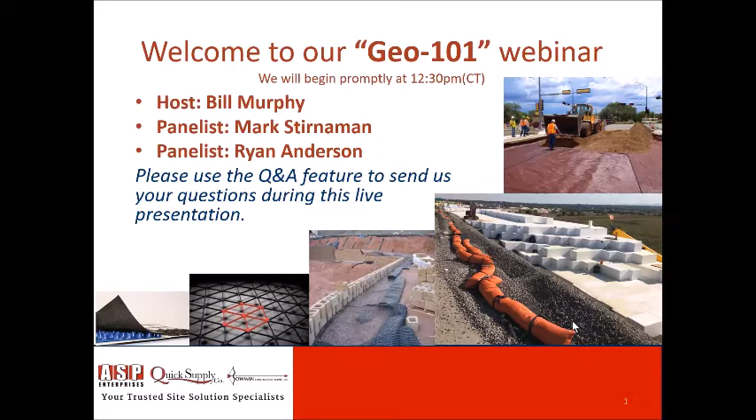I'm clicking in the screen and it says I'm controlling it, Don. There might be a lag. I may have already messed something up. Yeah, I don't know. There you go.

We do have one civil engineer on staff, that's me, I'm licensed in the state of Iowa. For our engineering friends on here, we never compete with you, we always help you. We're not in the engineering business, we're in the trusted advisory business on construction supply materials. I like to say that we are an important liaison between the designers and the owners and the contractors and the reviewers and the installers and maintainers, inspectors, everybody that's involved in a construction project. We get to be involved with all of those folks.

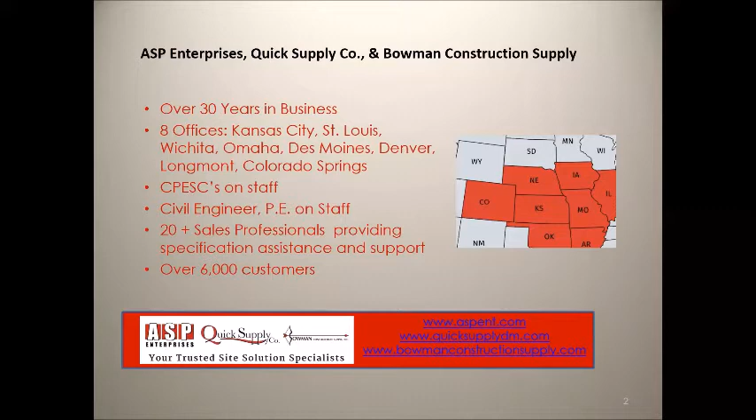But for right now, we're all up and running. We have been fully operational through this entire COVID-19 quarantine, and we have our trucks running all over those states that we showed you earlier. We've been following a lot of safety protocols. In fact, we were one of the first companies that I witnessed following safety protocols immediately.

We have some of our staff at home while the rest of the staff are at the office, and we have our doors locked. We're not pressing the flesh, as they say in the politics business, but we are taking a lot of phone orders, and we're fulfilling a lot of orders. Our trucks have been very busy. Our warehouse has been very busy.

With that, let me apologize if you hear some warehouse noise. I'm sitting in Quick Supply Company's warehouse in a private office, but you will hear some noise as we are open for business, and we are a very good logistics company.

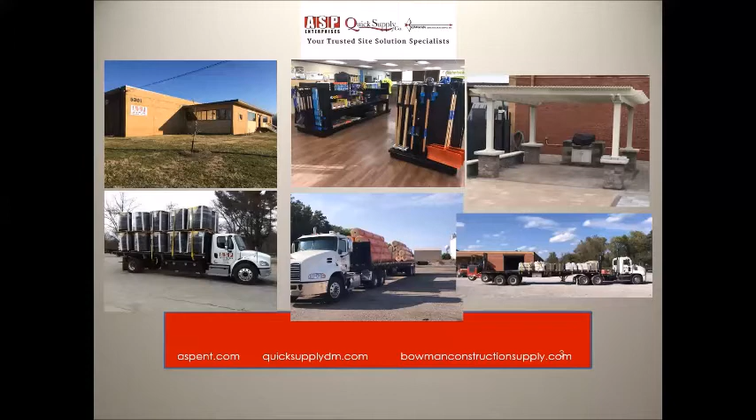We can bring a whole lot of different site solutions to a site, make it convenient for the contractor. We're an important part of that relationship with contractors and owners. One of the neat things that's really grown over the last several years, and I've been with the company for over 5.5 years, is our relationships with all of those parties I mentioned earlier.

We have some cities that count on us to help with innovation, especially in the stormwater world, in the low impact development and green infrastructure world. But one of the things we never want to do is lose sight of our roots and how we got started as a company. Geotextiles are at the heart of our operations, and they always have been and always will be. Some of the products we talk about may be considered commodities, as they are not as much the engineered products, but even commodities are part of a properly designed, properly installed, engineered solution. We take all of those solutions very seriously.

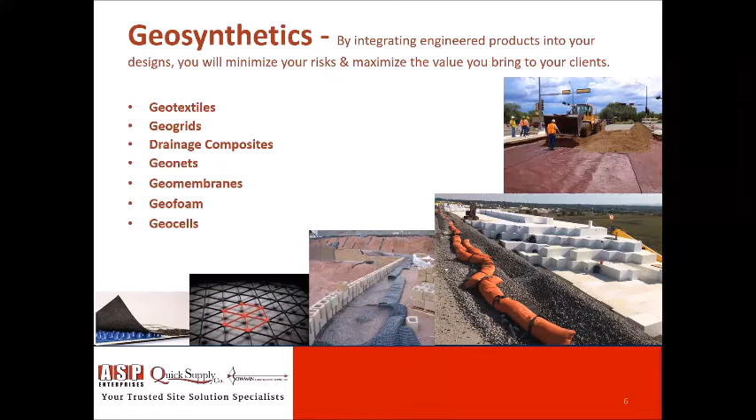Additionally in the front there, you can see geotextile bags, Big Reds, ASP cells, Dandy Bags, and Bowman's for erosion control. So geotextiles can be incorporated into projects in many different ways and aspects.

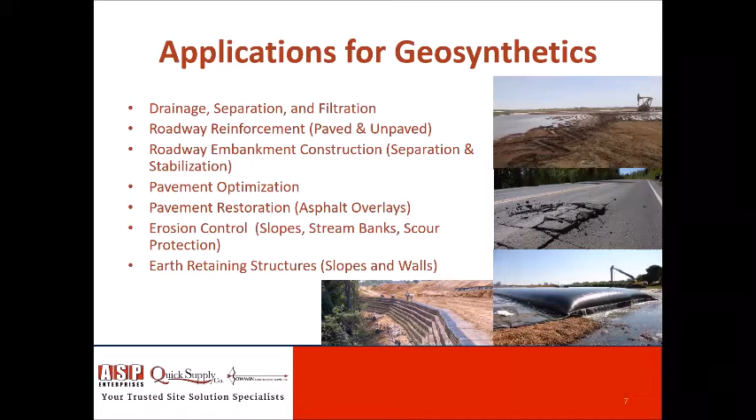Throughout this project, we hope we can challenge you to look at geotextiles in different ways. Maybe think outside the box about how you're going to use geotextiles and broaden your general knowledge of those.

Now for the history of geotextiles. Geotextiles began in the 1920s with cotton fibers, and through that period there wasn't a whole lot of innovation.

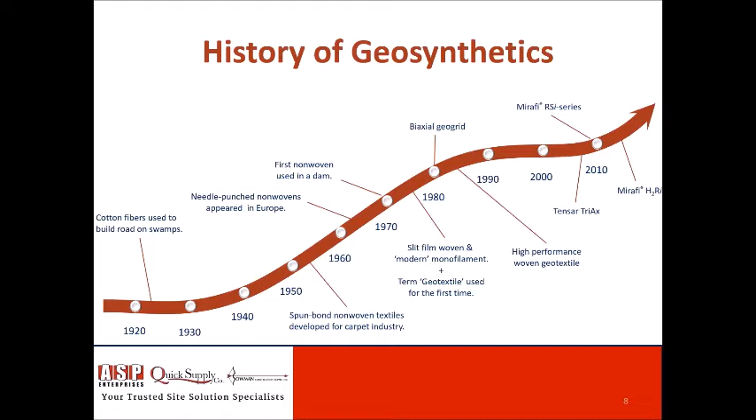To start off, one of the most common geotextiles is a non-woven geotextile. That comes in primarily two types: needle punch and spun bond.

Needle punch is just like it sounds: long needles that shoot at a very rapid speed up into the fabric. If we were in your office, we could show you a sample of that. People call it Mirafi, or that felt fabric - that's a non-woven needle punch fabric, commonly used for drainage applications.

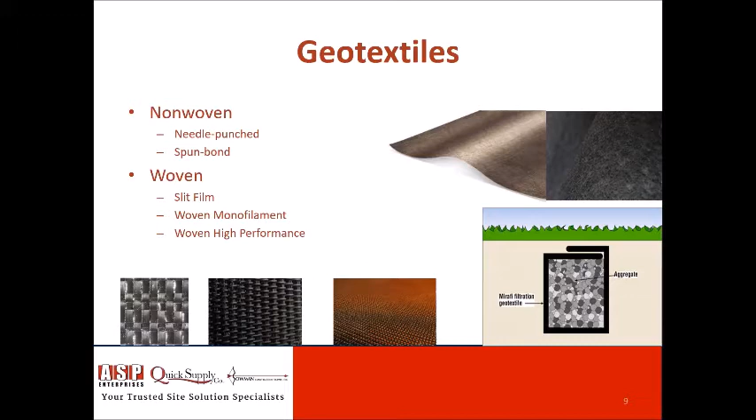In the bottom right-hand corner, we have a detail showing a French drain that would use a non-woven. Mark, anything you want to add on that? There's another slide coming up with the non-woven stuff in a bit, we'll talk more about them.

Okay, geogrids. Geogrids come in all shapes and sizes, and they've really evolved throughout the years. Probably the most common is your polypropylene, which is a punch and drawn geogrid, commonly used for road-base stabilization - your Type 1 or Type 2, or your triaxial grid, as you might hear people refer to it.

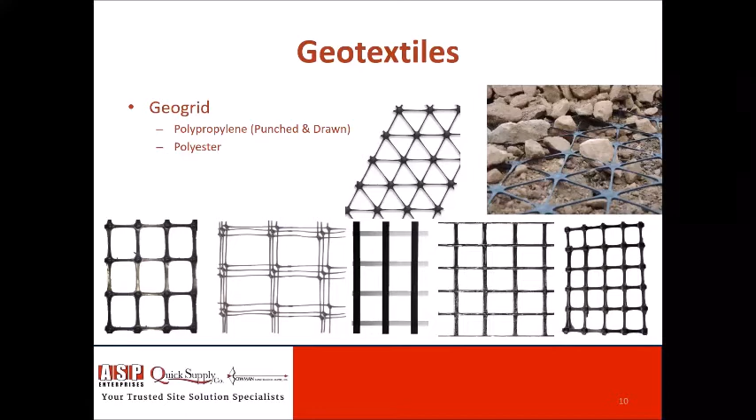One of the most common applications for a geotextile is drainage geotextiles. The most common fabrics that we sell, or you'll see in the marketplace, would be like a Mirafi 140N, the N series, or the S series, which is the environmental series.

One of the things we'll talk about later is that within drainage you can also use a woven, a monofilament geotextile that we'll cover a bit later. We just want to bring to your attention that woven geotextiles can be used in a drainage application if you select the right one.

Some of the most common applications for the N series are French drains, or any type of separation where you're going to have rock separated from the native soil and drain it. They're also used for cushioning at times for liners or different types of construction applications. Anything else you think to add on that one, Mark?

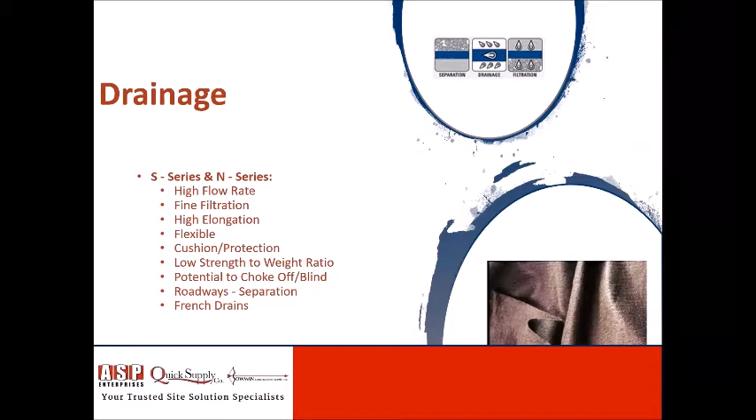Maybe riprap is probably the place people see it most, driving down the road. You see DOTs installing fabric under riprap all the time. A lot of that's another great example of how you'll see that non-woven spec.

In my humble opinion, it's really the better way to do it, wrapping the whole trench and not blocking the pipe. We sell a lot of what we call 4-inch perf with sock, where you put a geotextile actually on the pipe. There's nothing wrong with doing it, it still works, but I feel like it diminishes the performance of the pipe by blocking the holes somewhat.

If you size the rock appropriately, like a 1-inch clean rock, when you only have maybe at the largest a 3/8 diameter hole in your pipe, the 1-inch rock won't go through the 3/8 hole. You'll get a lot better flow through the rock, through the pipe, and convey that water away. You'll use the non-woven fabric to separate the soil from the trench and the rock inside of it.

I'm sure everybody on the call has probably seen French drains and specified French drains before, but it's, in my opinion...

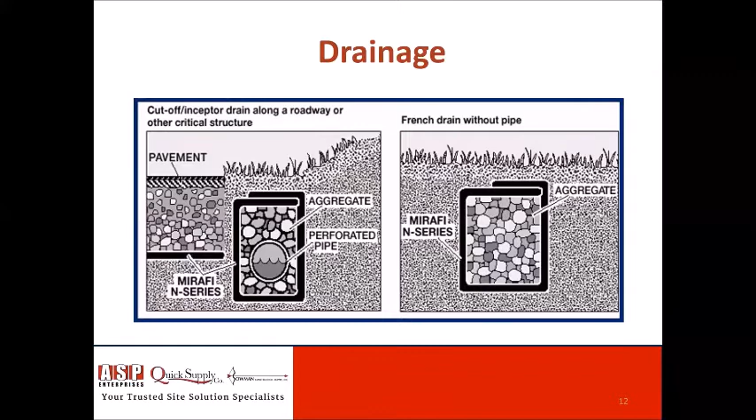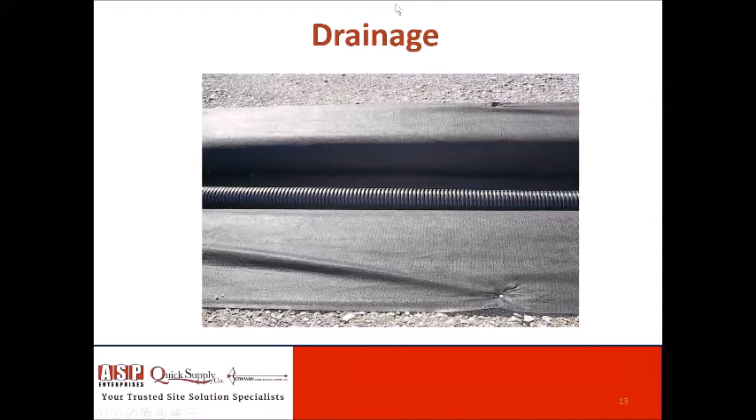Brian, I think you still have control. If you can... yep, we'll go to the next slide here. Here's a more real life example, this is basically a French drain, it's actually on an athletic field. This one is kind of neat because they use something... oh, now I got control. I feel more important now.

That picture with the French drain in the field, a lot of time was spent establishing that subgrade. They actually have a subgrade excavation plan on that job where they put the crown of the field in the middle, and that perforated pipe will take it away. Water will go into that trench and ultimately be backfilled with clean rock and conveyed through the clean rock and through the pipe itself.

The subgrade excavation plan part of it is that it's higher in the middle. It'll ultimately be covered with synthetic turf, but maybe there's 4 inches of rock in the middle over that pipe, and as you get to the outside, there'll be up to 12 inches of rock or more.

I used to think, man, that's a long name for fabric. Then the more experience I got, the more accurate I thought that really is the most accurate way to call the fabric riprap fabric, because the fabric is doing the work of holding the soil down. It's controlling the erosion by holding the soil where it's supposed to be. The riprap, or in this case articulated concrete block, is doing its job of holding the fabric down and dissipating energy. But without the fabric below it, it would scour out around the rock, around the concrete blocks, and you wouldn't have ultimate success.

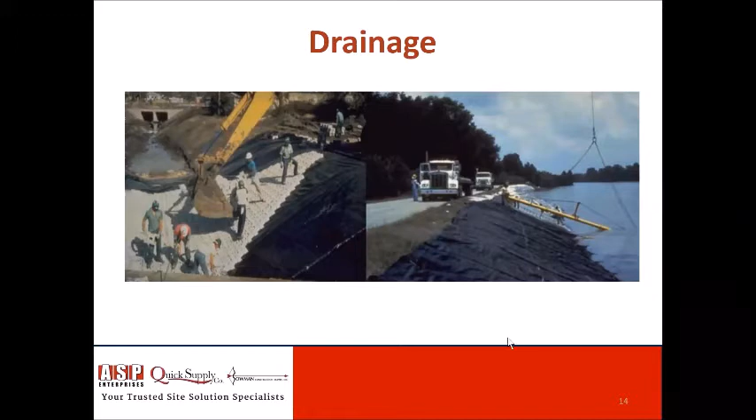So, yeah, one of the key things you'll see, even when you're doing riprap or any type of roadway, is separation. Separation is separating and maintaining the integrity of two dissimilar materials.

This can be really important to keep your aggregate clean, for example in the roadway application. Your aggregate is expensive and tough to come by. If you provide a separation layer, you can keep it from going into the native soil. If you didn't have a separation fabric, this is one of those examples of the old saying: 12 inches of rock and 12 inches of mud gives you 24 inches of mud.

You're very good at math too, Mark. Yeah, that's the old saying. So that is the key to separation anytime you're dealing with those types of applications. That's a great example and a great way of looking at it.

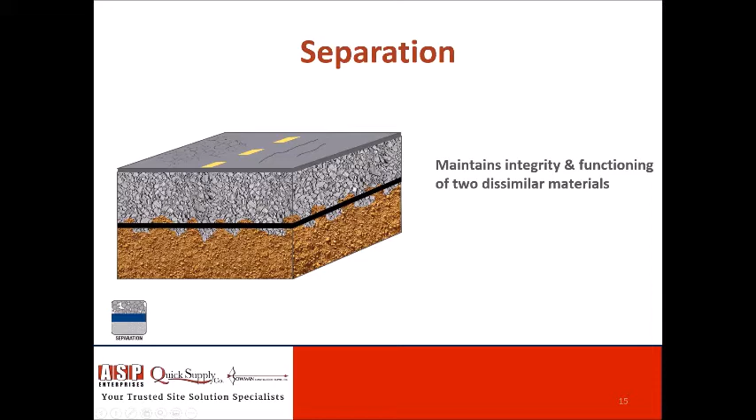The next key function of a geotextile is filtration and drainage. So like I was saying, one way a geotextile can be used is separation. Another way is filtration and drainage.

Filtration is liquid moving through a geotextile, similar to it moving vertically through a dewatering bag or any type of pass-through. Drainage is moving within the plane, similar to a pipe or a drain board, or one of the new fabrics that Mirafi came out with, the H2Ri series, which can move liquid or provide drainage laterally within a plane. It's the only type of geotextile fabric with that capability out in the marketplace.

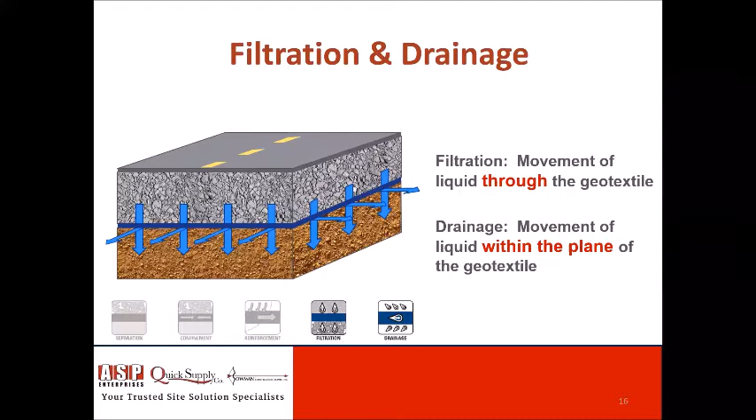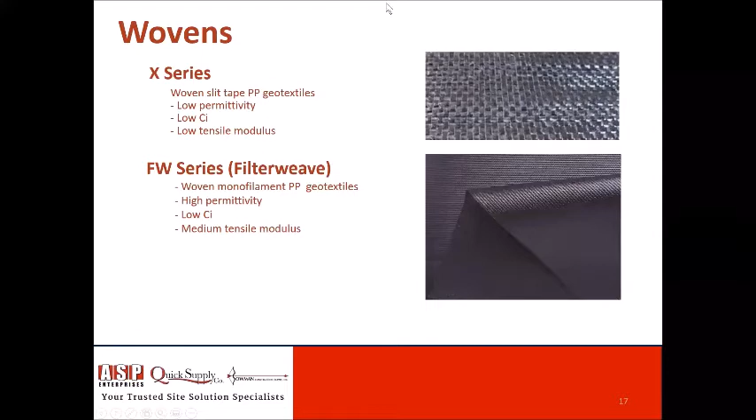Now we're going to switch gears. And we go from non-woven fabric to woven fabric.

The non-woven fabric, like Ryan mentioned, is always the felt fabric, the Mirafi, as people love to call it, and it's very popular, you see it all the time. The woven fabric, people call and say 'I need that shiny stuff, the slick stuff, the stuff that looks like silt fence.' That's the woven fabrics we get into.

The most popular one we sell, which is often the least expensive, is the X series of fabric, like 500X, 600X. I'm sure you guys have specified them in the past or seen them submitted. They were kind of the original fabrics when it came to specifying them on jobs. They were really good at the time, and they've been replaced with a lot better things. They still have their place.

We sell them on a lot of haul roads, where the contractor has to go in and install a haul road with some big chunky rock, maybe to clean tires and stuff. Ultimately, after 3 months or 3 years of the job, they have to remove that rock, and it helps with cleanup. So it acts as separation and adds a little bit of strength. It doesn't bring a ton of value in strength, so if there's a poor subgrade, we probably need to move to something a little bit stronger. But we sell 500X, 600X all the time.

The Filterweave series, like Ryan mentioned, gives you the best of both worlds. You're getting strength from a woven fabric, but they weave it in a way that has a very consistent opening and a high flow rate, so it lets a lot of water go back and forth. Part of the problem with getting the best of both worlds is the price isn't at the same point as an inexpensive non-woven or woven, but it also has its place.

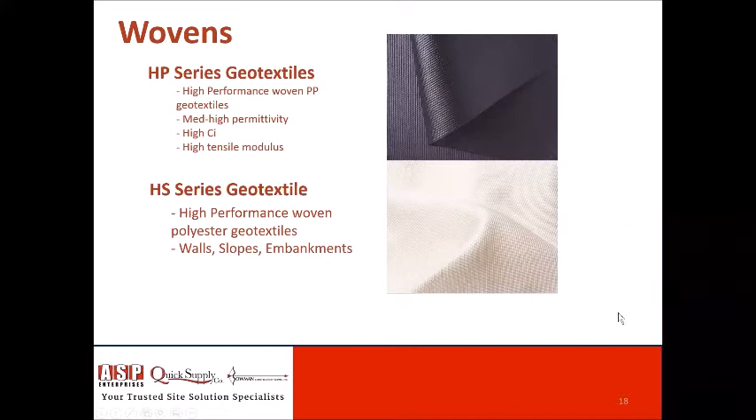Probably just pounded that arrow key a little too hard and you guys could all hear it, but hopefully it will actually advance too. Or it won't. One or the other. Someday it might get to the next slide.

With these geotextile applications, for the woven fabrics, we're trying to improve the subgrade or optimize the pavement. Improving the subgrade means improving the performance of the rock when you have poor soils below it. You install a geotextile, whether it's a fabric or a grid, and you improve the performance of the rock above it, trying to eliminate rutting and eliminate a dump truck getting stuck.

Alternatively, pavement optimization would be, maybe you have so-so subgrade below, and by using a geotextile of some sort we could reduce the rock section, reduce the pavement section. Asphalt isn't very hard to reduce. Concrete, being a rigid pavement, is harder, but Ryan has done it in the past and made it work. The better option in pavement optimization is maybe leaving your cross section the same and improving the life expectancy, so it's something you don't have to come back and work on again down the road.

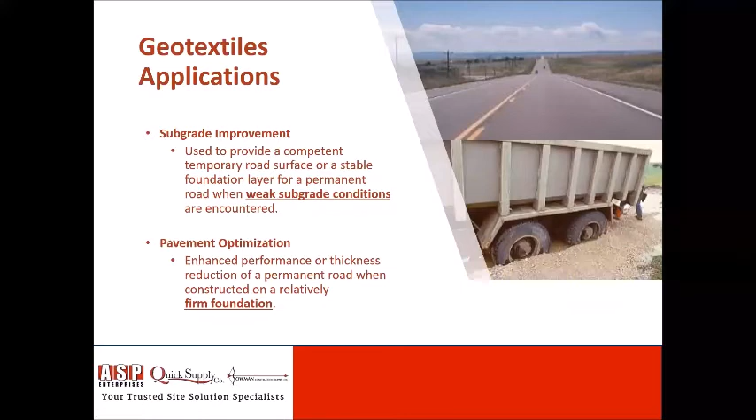Let me see, I think Ryan's going to talk about the next slide, which is some pictures of every option. I wish I could get it to go better. There you go, Ryan. Perfect.

Thanks, Mark. I'm sure a lot of you guys have been out to a job site and seen something similar to this. What we want to detail here and show you guys is how the different fabrics look when you get to a job site from a separation standpoint. If you look on your far left-hand side, that's a non-woven geotextile, similar to your 140, 160, or 180N. The middle is a geogrid. And on the right-hand side is an RSI series, or a high-performance woven geotextile.

As you can see, if you went to push aggregate over the top of it, on the far left in the non-woven, you can see the water bleeding up through, and it's going to sink. It doesn't have a lot of tensile strength compared to the RSI series on the far right, which has tensile strength and will provide separation. In the middle, the geogrid will get a snowshoe effect, but you're also going to get mud pushing up through, which will cause contamination of your aggregate level. So we just want to show you guys what that would look like with these different types of geotextiles on a real world job site.

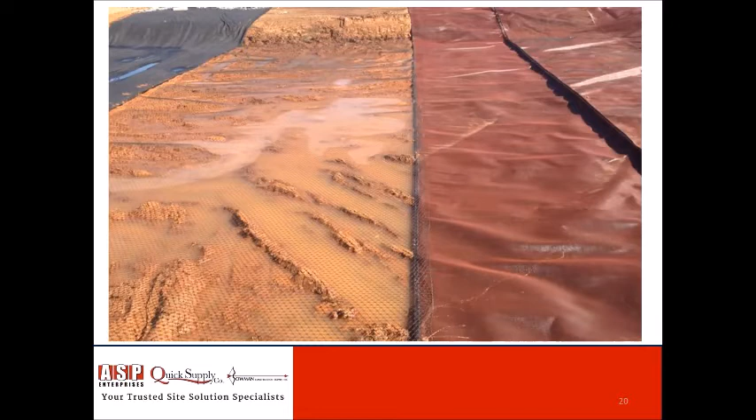I'll go to the next one, Mark. And within that we'll talk about flow rates. You guys can all read these pictures, but I pulled a couple of the data sheets up just to give you comparisons.

140N, like we talked about before for the French drains, the non-woven fabric, flows at 135 gallons per minute compared to a 600X that flows at 4 gallons per minute. So you can see the different flow rates. If you look at the RSI series, the 380i, that flows at around 85 gallons per minute.

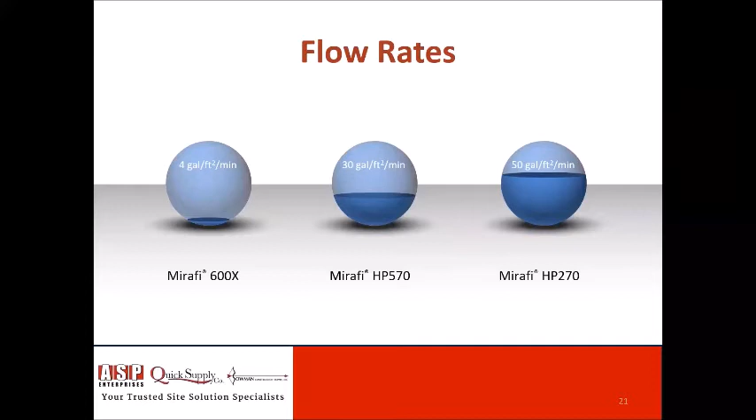So how do these bring value to your pavement sections? As you see, that tire would roll down and put force on the pavement below it and on the rock. That rock will want to move down and out and then back up, and that's what ultimately creates that rut that no one wants.

The goal of the fabric is it works by friction. If we were able to be in person with samples, you could tell, like I mentioned, the 500X being shiny and slick - not a lot of friction on that geotextile. On the high strength fabric, one of the things they improved is how they weave it, and it has a lot more friction.

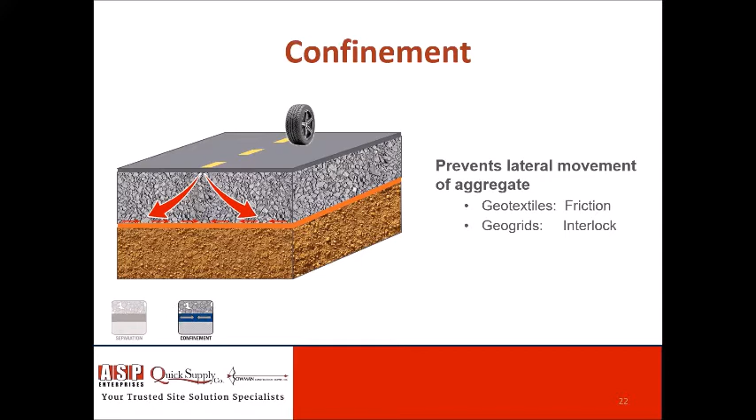So the fabric that's 5 feet away from where that tire is has friction between the rock and the subgrade, and it doesn't want to pull over - it has that tension to keep the rock from moving. Geogrid works in a bit different way, where it works with interlock, so the rock will strike through the grid and lock up the rock above it, keeping confinement so the rock doesn't move under the pressure of the tire and hopefully doesn't create the rut.

The reinforcement part is it adds tensile strength - it's got to be strong enough that when a force is pulled on it, it won't tear and rip. It improves the tensile strength just like rebar would in concrete, and improves the bearing capacity of that rock section. That's how we improve the rock section, by improving its bearing capacity.

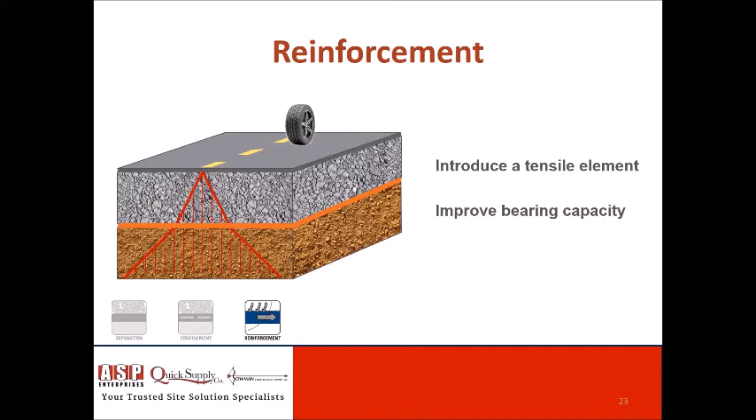In this picture, you can see on the left how those arrows go down - the wheels put a force, rock moves down and out, which is not good. The picture on the right with the rock striking through the geogrid - if it was geotextile, it would be having the friction and the rock would be supported, pushing out and spreading that load out.

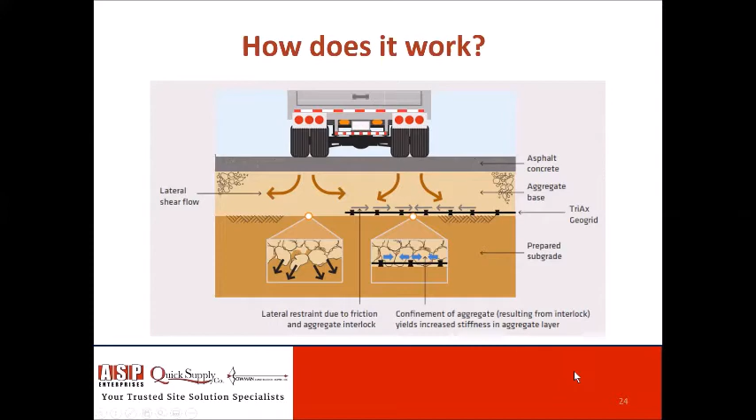Hey Mark, the key there too is it shows how the separation works. So on the left-hand side, without a separation layer, your aggregate's just going to push into your mud. On the right-hand side, your geogrid is providing the separation layer through dissimilar size of materials. Just another aspect of that portion.

A lot of times somebody might tell you that a geotextile has to be strained and reach that ultimate tensile strength for it to perform the best way that it can. It typically achieves those strains during construction, with construction traffic running over it. A lot of times on job sites, the heaviest loads anything's going to see is during construction - dump trucks backing over things, trash trucks taking dumpsters away. It achieves these things just going through the construction process.

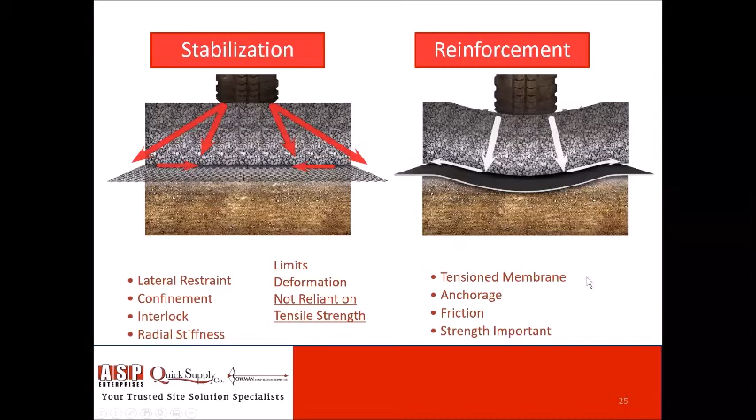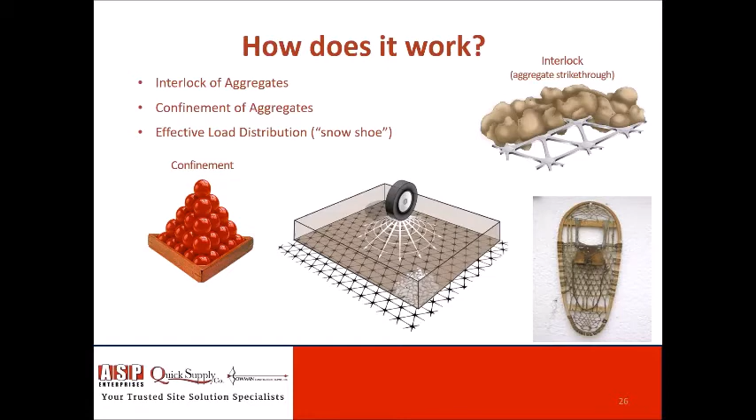So we have a couple examples of where we would place geogrid and how it would work. This is a very normal design. You start with, hopefully, perfect subgrade and you have no worries and it's the best job you've ever been on, but that doesn't always happen.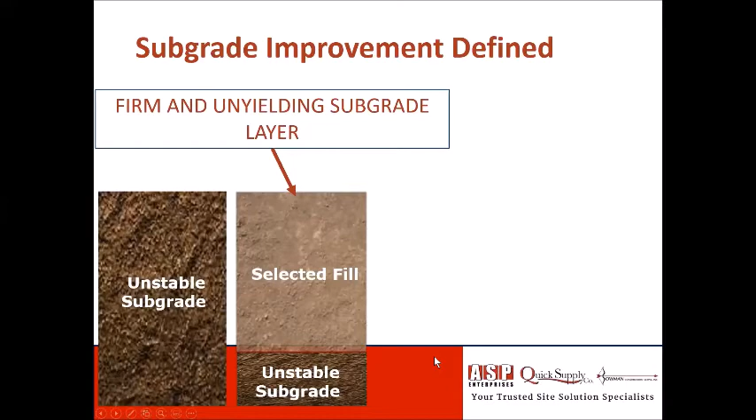So you start with unsuitable soil, poor subgrade, low bearing capacity. Your normal design would be to cut out so many inches of soil and replace it with select fill, like a minus rock or something. And maybe after you do that, you end up with some type of rutting, long-term settlement, and the wheel loads showing.

So this one shows a little bit more, like that subgrade started with a CBR of 2, which is not terrible, but it's not perfect. It could definitely be worse, but it could definitely be a lot better. So you get that rock moving out to the sides, rutting.

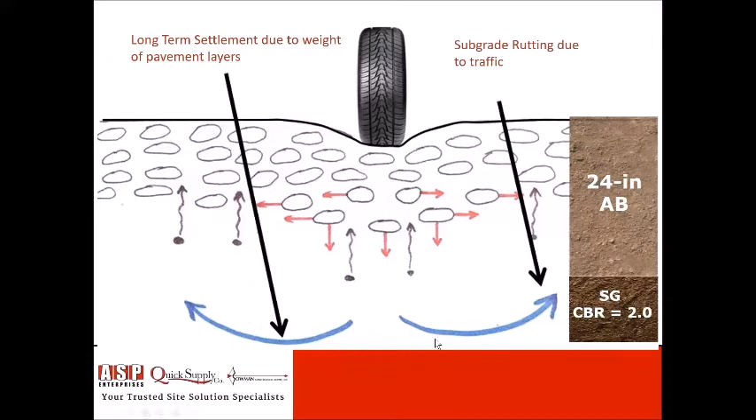And the way we would address it would be to add a layer of geotextile, grid, fabric, whichever. In a perfect world, we could do it with, you don't have to cut as much soil so there's less haul off and you can fill with less rock. There's 24 inches of rock in the middle section, 12 inches of rock on the section to the right with a layer of geotextile. So there's 12 inches less of haul off and 12 inches less rock to haul in. And you end up with the same design life, or possibly a better life expectancy.

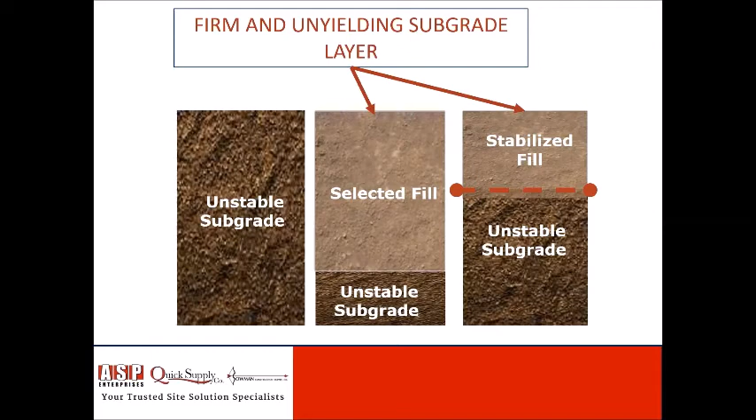Alternatively, you could still keep the 24 inches of rock and put that geotextile all the way to the bottom of the 24, and you would just dramatically improve the life expectancy of that pavement.

A couple other key takeaways on that portion too: when you're thinking about that, like Mark was saying, if you can reduce your cut or the over-excavation portion, you can dramatically reduce that construction time. So if you're working on a city or municipality project, you can get those city roads open quicker and faster, which the local people like.

Another big aspect is if you're hauling 24 inches of rock and doing a major thoroughfare for the municipality, a lot of those side auxiliary roads are getting a lot of wear and tear that they weren't designed for, from all the trucks coming in there hauling rock and moving that type of material. So you can reduce that impact on some of those side roads. I'm sure some people out here have done major city projects, and then the side roads end up getting so beat up from all the construction traffic on the auxiliary roads.

One other thing to mention about using a geosynthetic in that type of application compared to, let's say, a lime or cement treatment, is you reduce the curing time. So if you're going to do a lime or cement treatment, versus if you use a geotextile, you don't have any curing time, and you don't have to worry about weather constraints. You can just push your aggregate right over there. You don't have to worry about the freeze or thaw or rain. So there can be a lot of benefits to that.

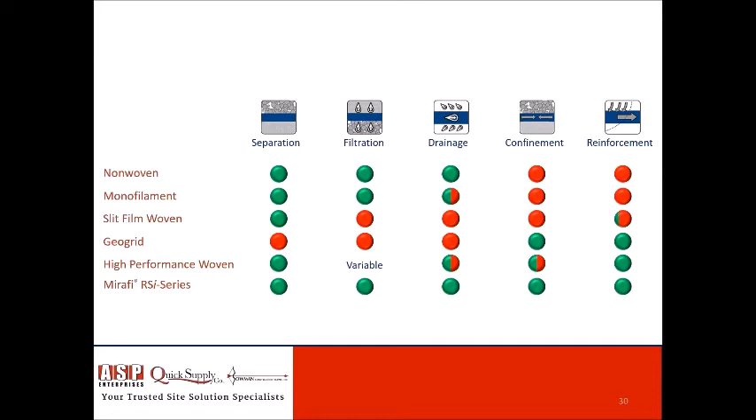And like Mark was saying with the geogrids, since basically 2010 when Mirafi released, I believe, the RSI series, the high strength geotextiles kind of combine both the geogrid and the geotextiles into one product, so it can eliminate that doubling of installation. You get the separation and you get high strength, high tensile strength and stability.

Also, one of the other keys we've hit on throughout this presentation is aggregate size. If you see in the bottom left-hand corner, you can have a large pit run. If you use a geogrid with that, it wouldn't work.

That large rock wouldn't strike through the geogrid and wouldn't create interlock. It would almost slip plane across the top of it or just destroy the geogrid. With this fabric, you can push that rock across there. Maybe that's on-site fill, so you don't even have to import any material, and you can move forward with your project.

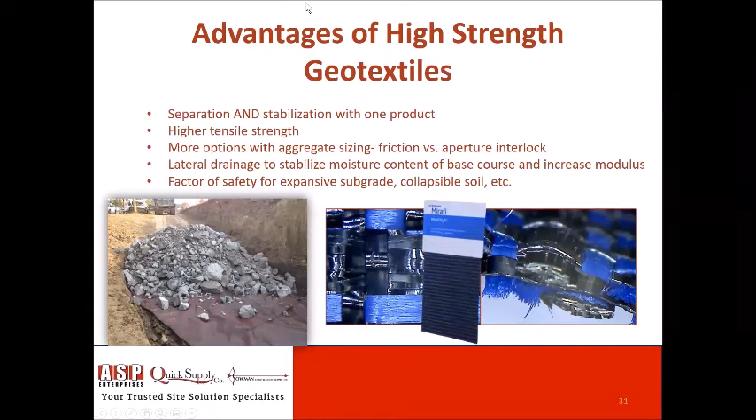We put that picture on here because that was a project Don Tiemann came up with the solution on when he was in the office and got called. Don is Ryan's and my boss, so I figure it can't hurt. Nicely done.

So we wanted to touch on a few things. We get a lot of these questions about installation, like somebody wants staples with their order of geotextile or geogrid, or how much is the overlap.

With overlap, we don't have a good answer because it's very dependent on what the subgrade is like. The manufacturers always recommend 12 inches to start with. Can you get away with 6? Probably, if the subgrade is really good. Ultimately, you want 100% coverage. If you're on a really poor subgrade and you overlap at 6 inches, and a dump truck drives over it and creates a 1-foot rut, you're going to pull material away from the overlap and you won't have 100% coverage. So overlap is very much dictated by the strength of the subgrade, but it always starts at 12 inches and mostly goes up.

It can even get to the point on some jobs, like if we're trying to use a geotextile to do an ash pond closure - in those cases we'll sew the geotextile, so you won't even have an overlap. It'll be a sewn joint or sewn seam.

No special pins or zip ties or anything like that. You can use staples if they facilitate it. If it's a windy day, you can use a pile of rock. On geogrid, it's really best to just start pushing rock on it and let any kind of wave work its way out. You can definitely get on top of the geotextile with equipment, you just want the rock down first.

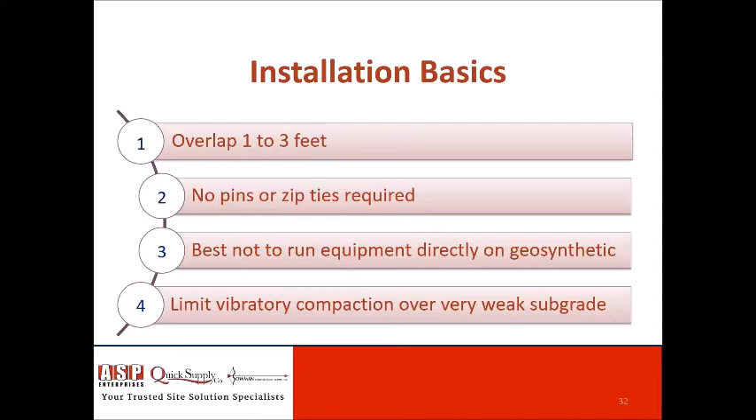It goes right along with what you talk about with the pre-con meetings. Pre-con meetings are very important, but a lot of times during construction, the same person that was at the pre-con might not be on site. So if you're there, you get to help them. And we're really invested in the success of the project - the success of the engineer that specified the job and the contractor that won the bid, all the way to the owner.

We have this saying I use more for turf reinforcement mats and erosion control, but a bad TRM job is bad for all TRM, not just the one specific one. And that applies to geotextiles too. Whether we sold grid or someone else sold grid, we don't want it to go poorly because we don't want people to be averse to using it. So kind of getting back into something, wrapping some stuff up.

You may have seen this chart in the past. It's something we used for tons of years, and to be honest, it's just not very good. It was the best available for a long time, but it's very subjective to the person using it. I get a lot of phone calls like, oh crap, we hit bad soil. What do we do? How bad is the soil? Will a loaded dump truck rut 1 to 3 inches? It's subjective of the guy, whether he wants to get out a tape measure or not.

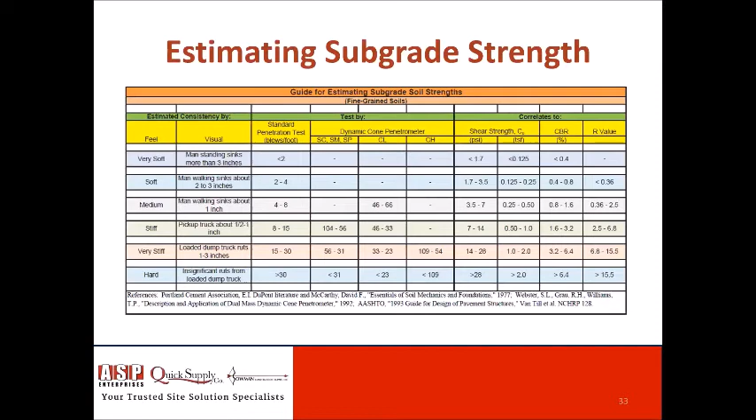So it's something we used when it was the best available, but now we have something a little bit better, that guy holding a DCP, which you guys probably know 10 times more than we know about. It's a tool we invested in to try and give contractors a more qualified answer. It's not something we ever want to take business away from an engineer. We always recommend hiring a geotech, have them come out and do what they're great at doing. But if we can help by having a more educated opinion and better conversations, maybe eliminate 2 or 3 conversations to get more productive ones going.

And it's just fun being on a job site, figuring something out, satisfying curiosity. I could tell you that the CBR of that soil outside our building in Fenton was above 4. So basically, once a CBR is above 4, we're not looking very much to use a high-strength geotextile.

Another tool we have is Mirafi and Tensar. Both have design software. Mirafi and Tensar are the two main geotextile suppliers, leaders in what they do, and they've invested a lot of money. They spend more money on research than everybody else, and more money on testing than everybody else. They've both developed design software that is tremendously valuable.

This is a snapshot of Mirafi's design software. Without going through the whole thing, it basically shows you all the inputs: 20 inches of rock is equivalent to 6 inches of rock plus a layer of RS580i. I bet it took less than 3 minutes to come up with this design, once you knew the CBR. That's the factor that changes everything. A CBR of 5 wouldn't even need the RS fabric probably, while a CBR of 1 would change everything a lot. So CBR is important - everything else can be an assumed value that we can correlate to other designs.

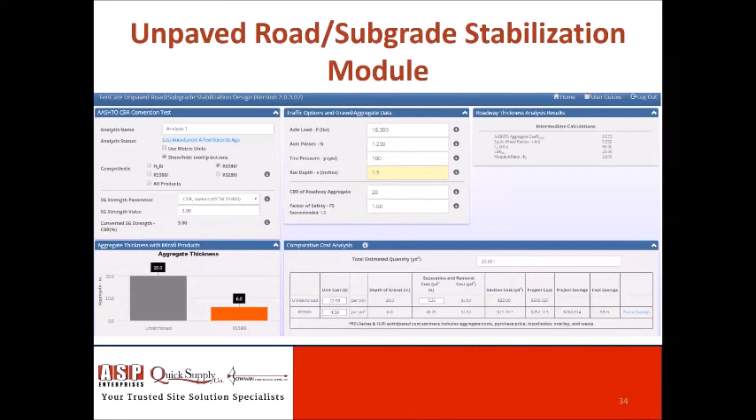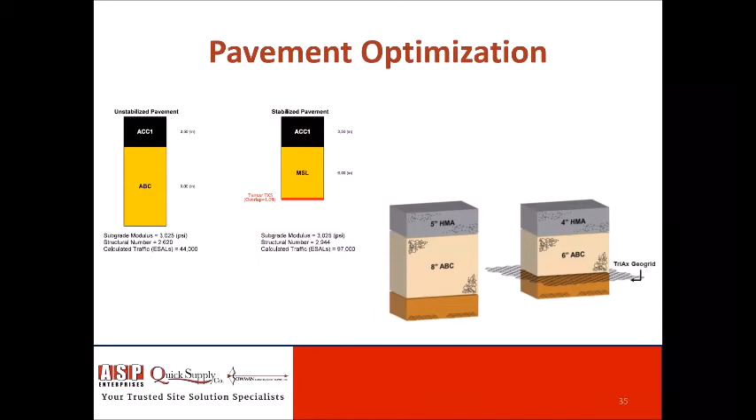Tensar has their own design software. We took a screenshot of theirs to show what you might be able to do for pavement optimization. This is the kind of result you get: without geogrids, you get 9 inches of base with 3.5 inches of asphalt. With a layer of TX5, you could go to 6 inches of base, 3.5 inches of asphalt - and by the way, it also increases your ESALs by double. So you use less rock, less dig out and haul off, less rock to haul in, and you dramatically improve the pavement life expectancy. In another example, it brings a little less value - only saving 2 inches of rock and 1 inch of asphalt, but still more than pays for the geogrid.

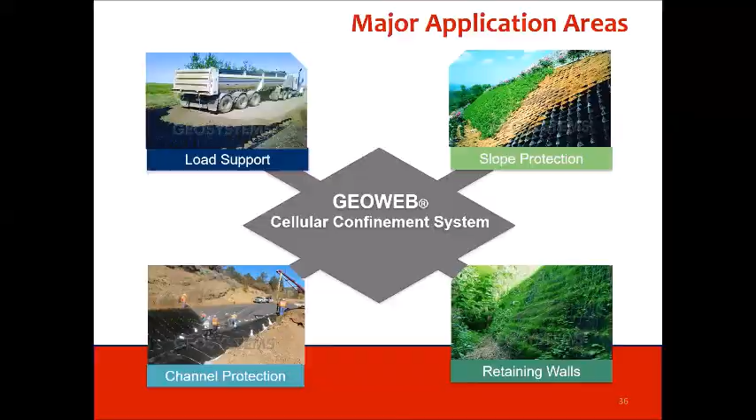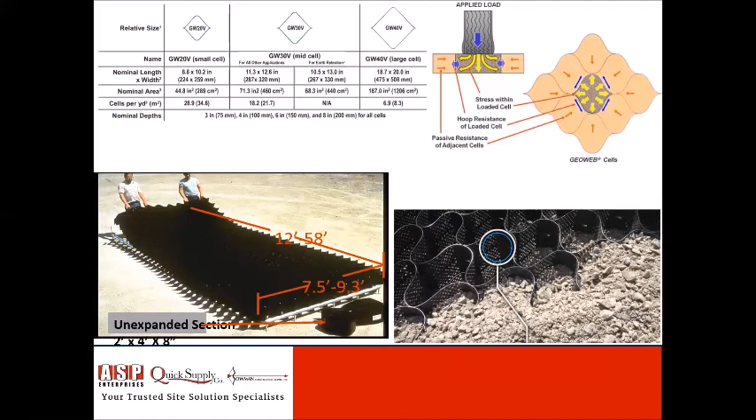It's up to you, I want to get to Q&A. These are just a couple of pictures of other things that might fall into geotextiles that we sell - load support. GeoWeb is something that falls into that category, and we can do it. It's a neat tool that does a lot of things. It shows how important confinement is, with 4, 6, 8 inches of vertical confinement. It was invented by the Army Corps to build runways in the desert. We put it in there because it shows how important that confinement is, how it can spread out that load. And I'll be honest, it's expensive.

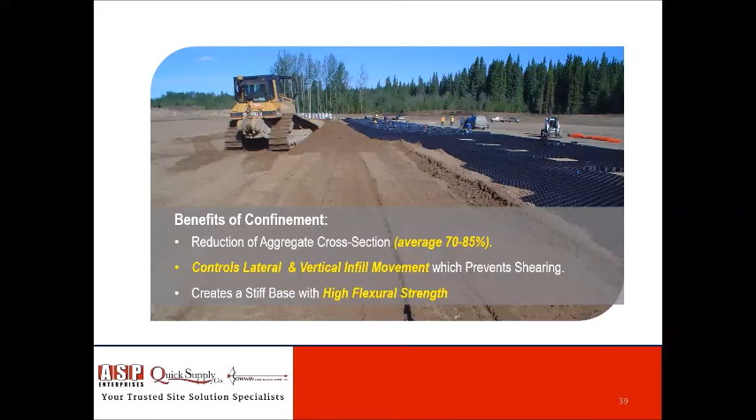It's way more expensive than a layer of geotextile fabric, but it might be what you need in certain applications, like building somewhere 3 hours away from a quarry. We're blessed in Missouri to have inexpensive, good quality rock around every corner, but if you travel 2 hours south of St. Louis, quarries are not as prevalent. So it's a solution that can change things.

Liners are something that we do. Ryan, I don't know if you had a quick thing you wanted to add about liners. Not a ton, I would just say a couple of big things for people who either specify them or work with them. Think about seaming. Whether you can use a solvent or a tape with a PVC or EPDM, whereas a lot of the other liners listed, you'll need a heat weld gun, or potentially, if you don't have that, a technician to come out on site.

Just a couple other things to think about is UV stability. PVC is not UV stable, so if you're going to try to use it on a project that's going to be exposed to the sun for many years, it's going to fail over time. And I think another big thing is hydrocarbon resistance. Are you going to have a potential for any hydrocarbons, diesel or gasoline, to be spilled on that? If so, think about your liner selection. We just wanted to spark that idea and that thought process whenever you're looking at liners.

And one of the things we're really good at, with liners and a lot of other things, is knowing who to call. If you call your local ASP Quick Supply Bowman guy or salesperson, we might not be the world's greatest expert at a liner, but we know them and we know who they are, and we can connect people.

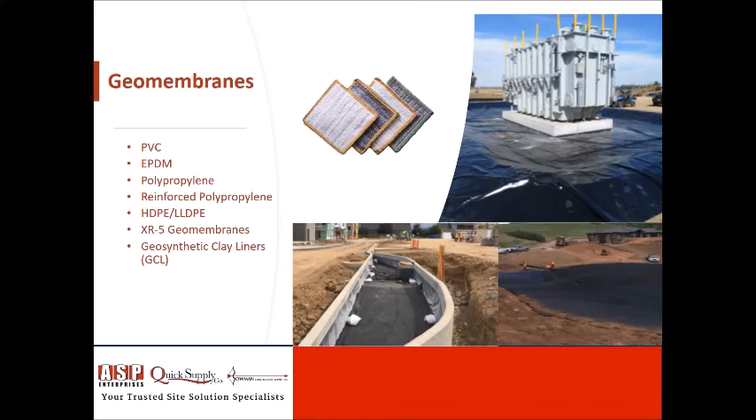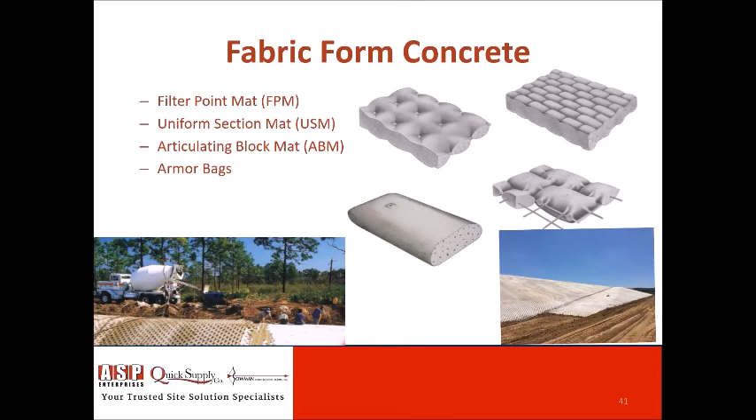That really kind of wraps up everything that we had. I see that there's some questions, Bill. Yeah, I can help you with those. So, man, I told you 9 minutes left, and you chopped it right down to about a minute and a half. That was quick. You guys did a great job of keeping us on track, and I appreciate it.

One of the comments was not really a question, but Bill Heatherman just said he likes your point about wrapping on the outside of the rock instead of just against the pipe, because it makes sense. That's just one of those tips that all of our sales staff are technical people, and you guys just have so much world experience.

I say you guys, for those who are sitting here on this webinar, I'm not a salesperson, I tell everybody that, and those of you who know me know I say it all the time. And it's not because I don't want to be considered one. It's because they deserve better respect than that, because our sales team has so much vast experience, not only on the proper design and selection of materials, but on getting it on site, handling it, properly installing it, maintaining it, pros and cons to different options. Because a lot of things we run into are not just one answer fits everything, we can give you different options and different budget costs. But him thanking you for that tip is pretty cool as far as I'm concerned.

One of the questions that was asked, and one of you guys mentioned it, we're going to get a little specific, but we won't have much time. It's 1:20 now, we're going to wrap this up right at 1:30. We'll get into some of these, but why is non-woven not necessarily good for landscaping versus woven? And I think that could have been a little bit of a misunderstanding, because it depends on what they mean by landscaping. So for someone just considering landscaping, would one of you touch a little bit on non-woven versus woven?